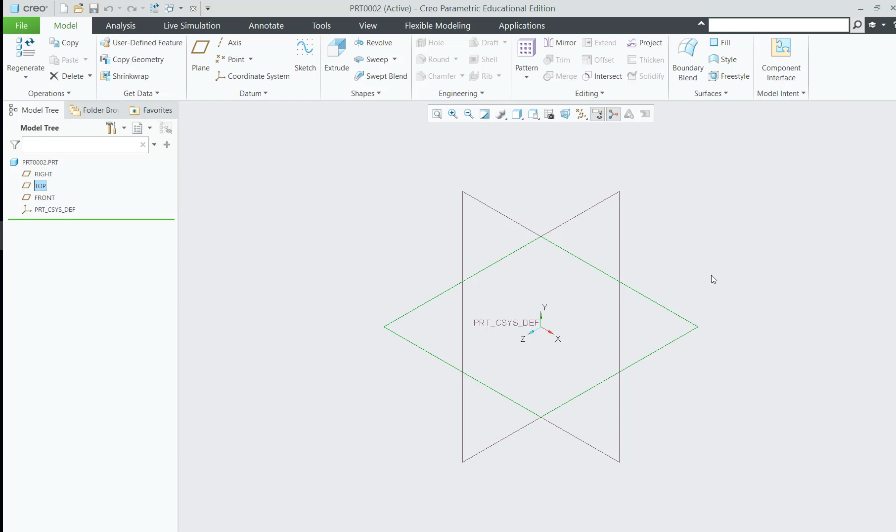First, I'm gonna show you how to create a part using some hole wizard. Let me display, select all display on. Okay, where is the other one? Here it is. So the top view, let's say front view sketch, make my favorite circle.

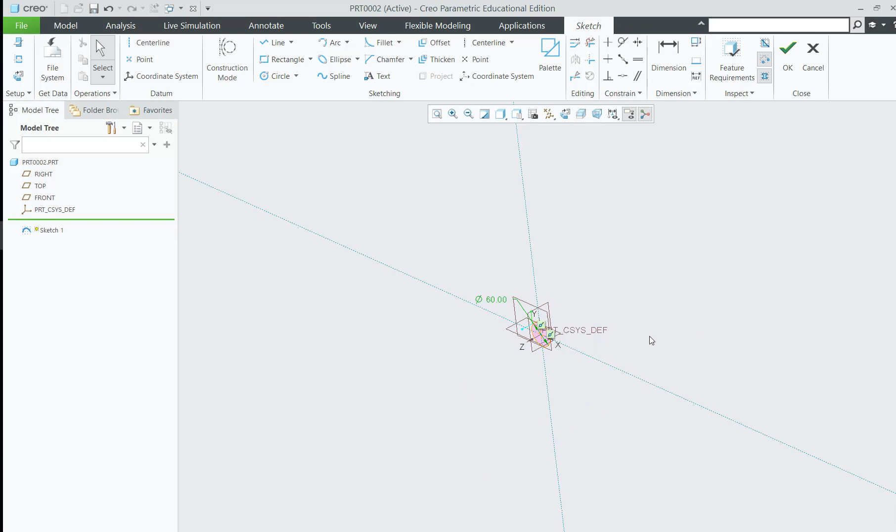Okay, say the diameter is 60. Extrude it, say 40.

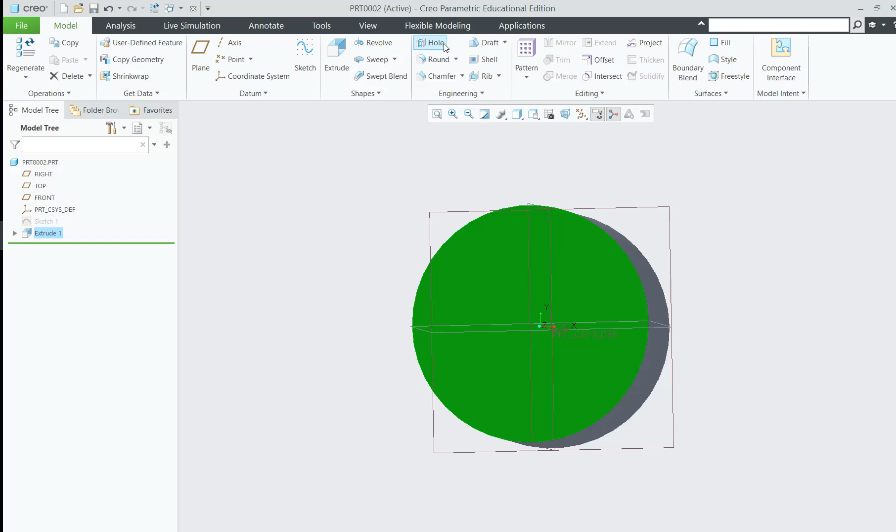Now I'm gonna make here hole wizard. I'll use this hole, select hole. All that I need to do is select the location of the hole. There are 2 points that you see in like a square bracket kind of thing, so you drag those points and give reference to attach where the location of the hole is.

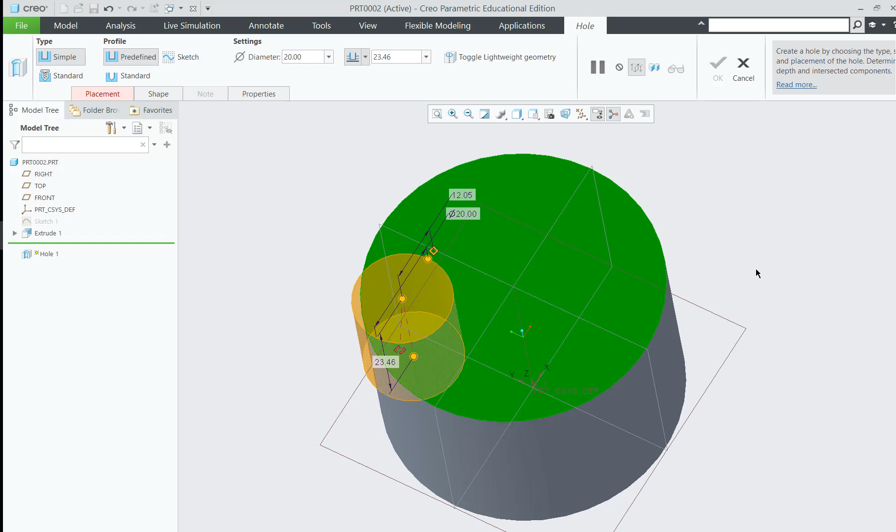Now I will pick this and touch these, so it will take a reference of 12 unit, and I do the same thing from the other one. I'll drag that point and touch this. So now it specifies the location of the hole.

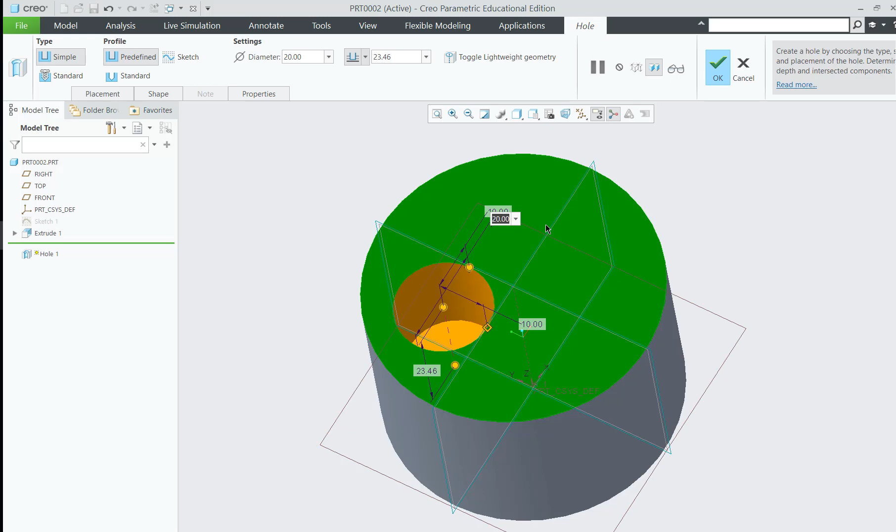Now I will specify, let's say this is 10, and then I'll specify this to be again 10, equally, and then the diameter, let's say 10. That's how you make a hole.

You're done. So alternatively, you can do here. Here is where you change different configuration: simple hole, predefined hole, and whether it is completely or up to certain or symmetric and so on.

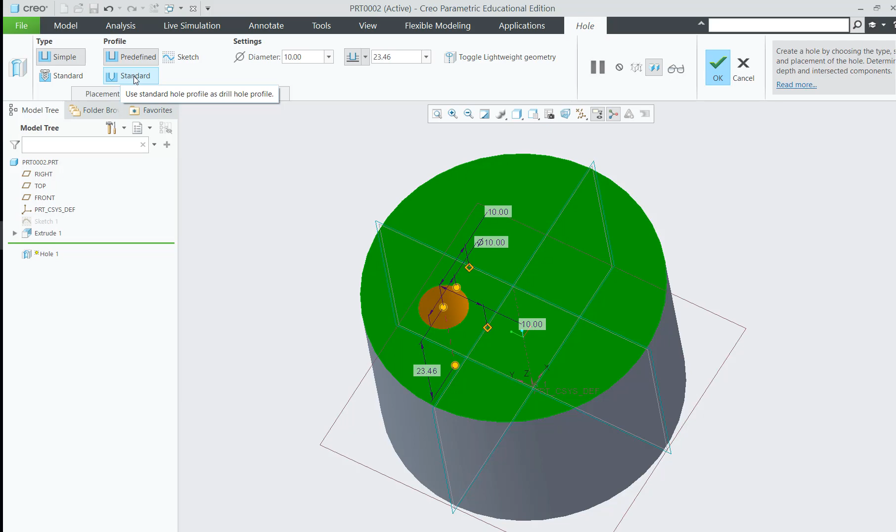Or you can use here standard, create standard hole like this. Standard hole, let's say counter bore. See counter bore, you see the shape of the counter bore. So now this outer diameter here is 18, the smaller one is 10, and it has a depth of 11 millimeter, and that's a standard.

And this is 180, so then I can edit this to standard, let's say the angle 120 at the end, and this height to be, let's say, 6 millimeter I want to make to the surface.

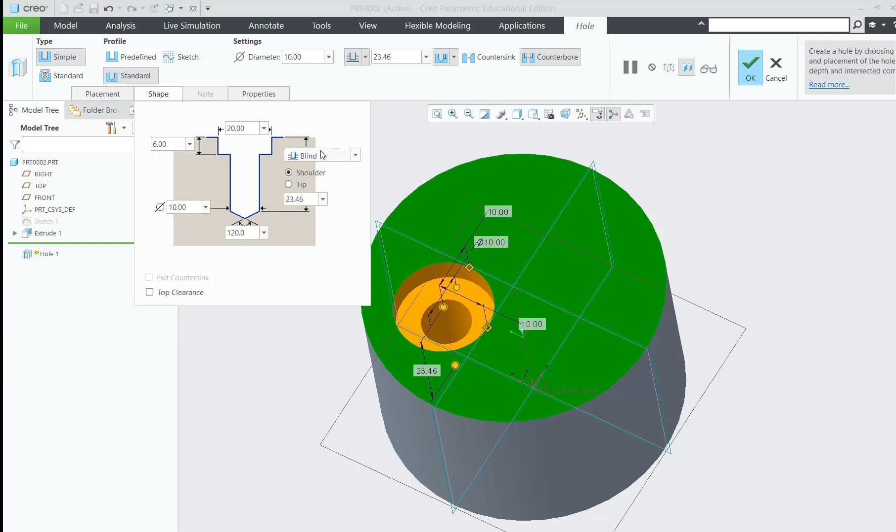And this one you can make it 20. And this height, so you can make it through hole, which is completely like this, and you may make it blind. Now I'll make it completely. Let me make this smaller, let's say 15, and this one let's say 8. I'm gonna make symmetric array. That's how you specify.

Now I make this counter bore, so properties, placement is already defined. Then okay, so here is my surface. The next thing I'm gonna do is let's say I create arrays of these holes. I think it's big, so let me edit.

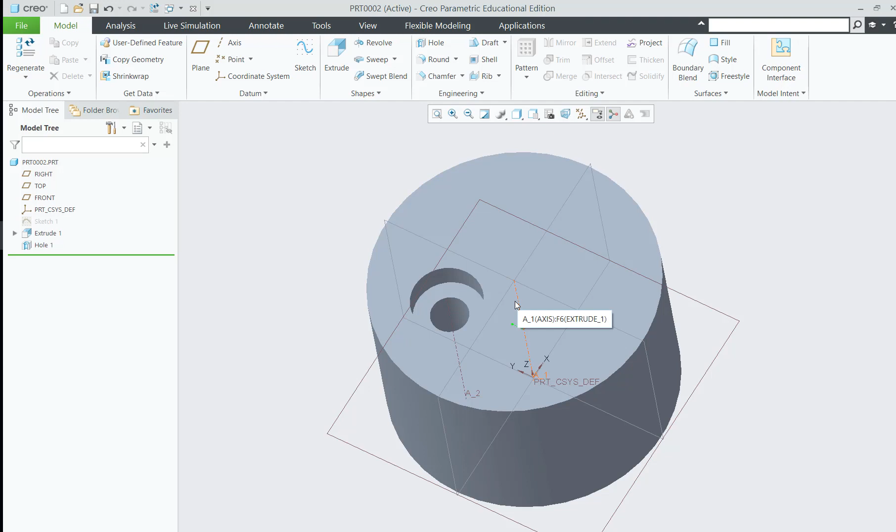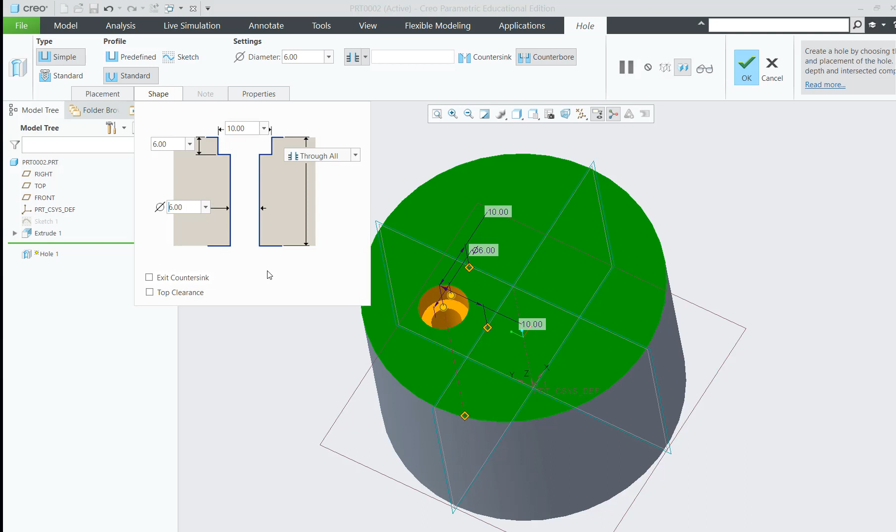Right click, edit, shape. Let me make it 10, but 10 will not work, right? So if I make 10, then this has to reduce. So now it adjusts itself. Let's say 6, okay, you can make it like that too, and 8. But you can't make this smaller, otherwise it will not be counter bore, right?

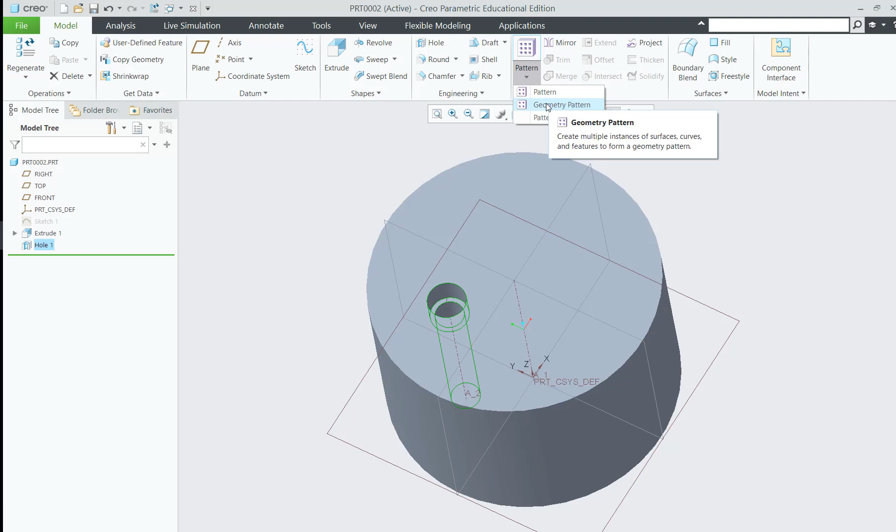Now we have the hole, or let's do pattern. So just select that, and geometry pattern. This pattern creates multiple instance. A feature gets one feature, and this one creates multiple instance of surface, curves, and so on. So I'll use this.

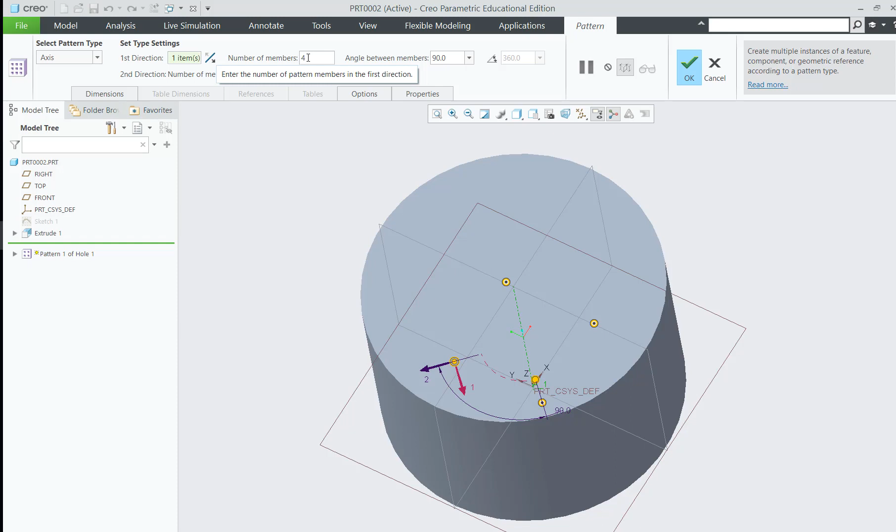So I'll make this axis to and rotate. I'll select when this is asking me to select the axis. I'm gonna make 4 and each equally divided. Then it creates this pattern. So I create all my holes at once. That's it.

Now I created my part, it's already counter bore. Okay, now save it. Save. Okay, so let me save it. My block with holes.

So I save it here. My block with, no, I didn't select here. Creo will ask you to file save as. So my hole with block. Okay, I saved it. Now I'm gonna make engineering drawing based on this, and you can get rid of some of the datum plane in the display.

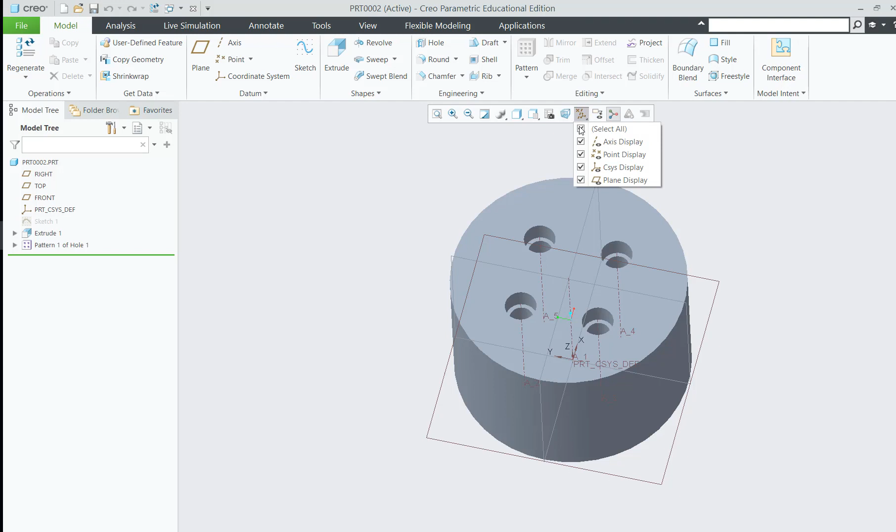This is annotation display, and this one you select the planes, get rid of them, and the Csys display, and you see the axis point. If I toggle the axis on, then if I toggle this, it will be displayed or not displayed.

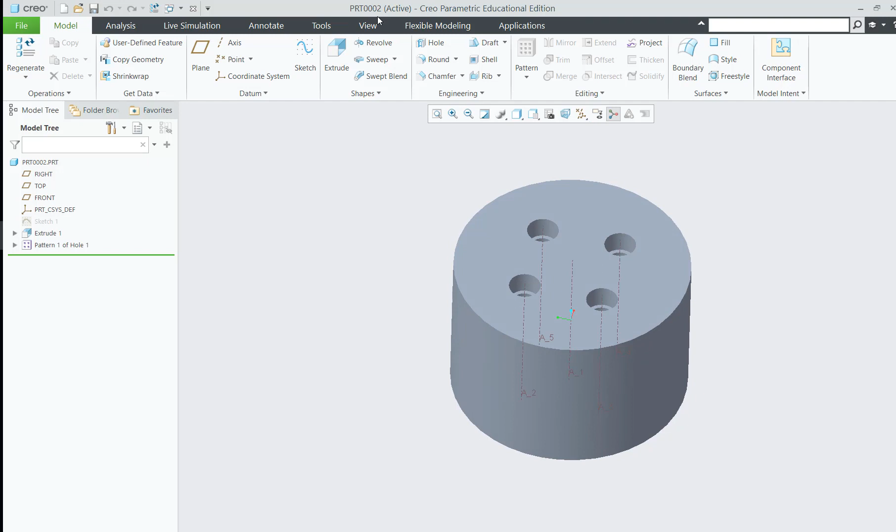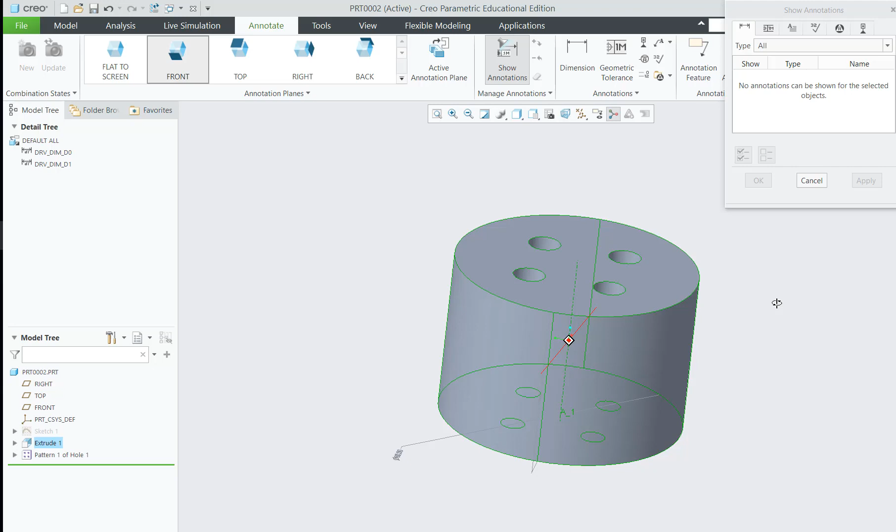Okay, if I show annotation, I can see here, for example annotation, show annotation. I select that, and you select all this, apply. Then you can display what is the geometrical annotations. You can select these two, then select all and apply. You can give dimensions in this.

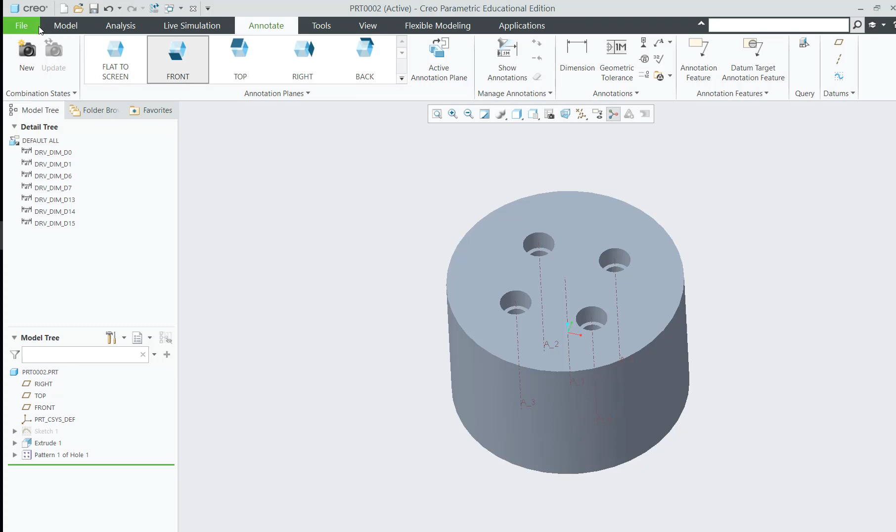I'm going to show you now, this is hole wizard. Okay, the next thing is let's make file, new, engineering drawing. Engineering drawing.

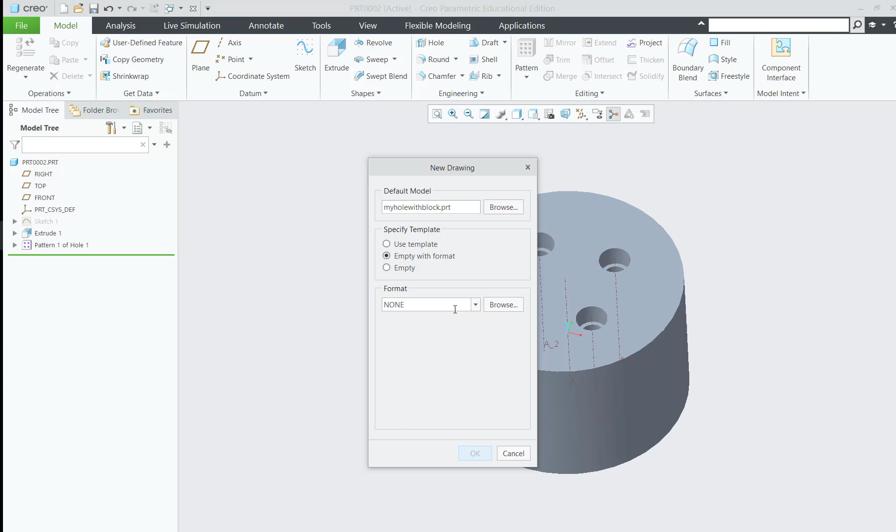Now it takes that part we created. If you want to browse the part where my hole with block, you can open the same file. Then format, you can use the template, or you may not use a template. For now I'll use the default, which is already there. Empty, you can use without empty. Okay, now I'll use this. So it creates...